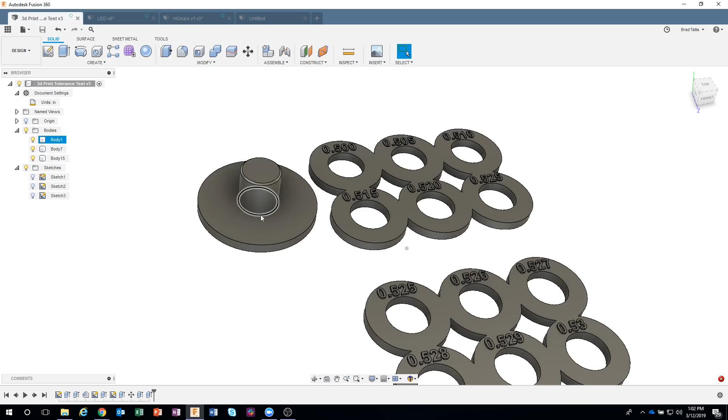And so what I do is I create what I would call almost like gauge blocks for testing out shafts and holes. So you can see here, I just created a really basic part. And if we were to inspect this surface here, we can see that that's a 1/2 inch diameter post. And then I print this and I say, okay, that's supposed to be a 1/2 inch. And let me go ahead and show you here. So here's that part.

I'll take my tool. Let me switch to inches really quick. And I just measure across that, and it's exactly 1/2 inch. So this makes me happy. My printer is pretty darn perfect for printing that post.

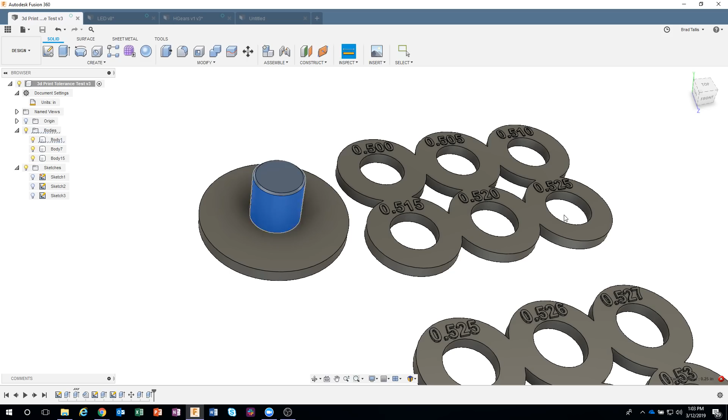Now, you'll notice over here, I have a bunch of rings, basically, and I've thrown some text on there. And what I do is basically create a gauge block of different sizes, okay? And when we print that, it ends up looking something like this. And so what this allows me to do is I can now come in here, and I know the very first one is 1/2 inch, and I can see that that actually does not fit. There's no tolerance there whatsoever.

And hopefully, I don't know how well this is going to share. But then what I can do is I've gone up about 5 thousandths on each of these. So I can see that one still doesn't fit. That one starts to fit, but doesn't go down the post very well, so that's still too tight. And I can just keep working along until, so here, for example, that one slides on fairly easily. And then this one here, again, slides on fairly easily.

So that's the 0.52 and the 0.525. So if we switch back here, it was this one right here, this 0.52 and this 0.525. Okay, so then what I do is I know that that's fairly close. Oops, I meant to drag. So then I created another one where I went up, 0.525, 0.526, 0.527, and printed that out to basically tighten that tolerance even more to figure out what is the best one.

And now I know that if I have a 0.5 inch post, I want to make the hole or whatever that fits over that to be 0.529. Okay, so I'm going to show you how I did this in Fusion. I'm going to show how I created these, and then I'm going to show you how to add this 0.529 to your designs. So a couple little tips and tricks here.

In this case, I'm going to switch into inch, since that's what I've been talking about so far. I'll create a sketch. And actually the very first tip I should show you in regards to 3D printing is right up here. You'll notice that my Z direction is pointing up. Okay? If I go into my preferences, you'll see default modeling orientation. And sometimes it could be Y up or it could be Z up.

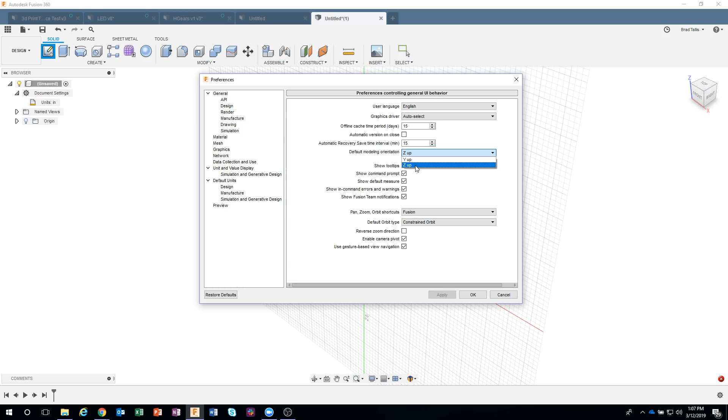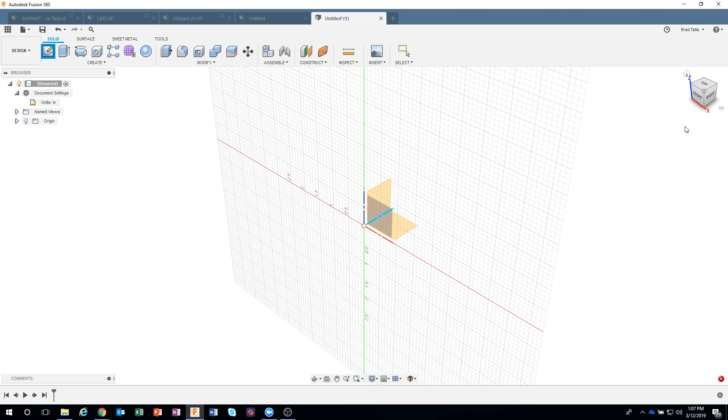And if you're doing a lot of 3D printing or CAM, for example, I would definitely recommend switching that to Z, because a lot of the slicers out there say that Z is in the up and down direction. So we want to kind of match that. If it was Y up, when I go to 3D print, my parts will be 90 degrees from the bed, which isn't a big deal, but it's just one more step that you need to deal with. So the very first thing I want to do is make sure that my Z is up.

Okay. Then I'm going to come in and create a sketch, and let's just draw it on this top plane. And I'm just going to create a circle. And in this case, let's just do 1 inch. Then I'm going to create another circle inside of that. And we know that we want to start at about 0.5, so I'm going to say 0.5. So I just created 2 circles, which basically creates this kind of washer shape.

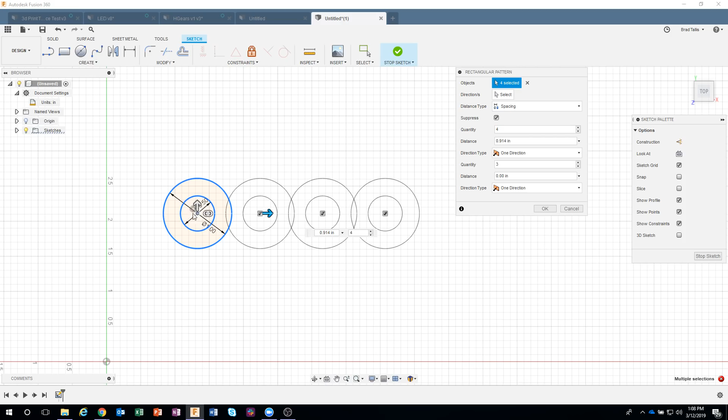Now I'm going to pattern this. I'm going to do a rectangular pattern. Just draw a box around everything and start to drag. Now I could leave the spacing like this, but then it's going to print out a whole bunch of individual blocks, gauge blocks if you want to call them that, which I think is harder to manage and deal with. So I actually overlap them just a little bit, something like this. And let's do maybe 4 in one direction, and I'll come down and do the same thing. I'm going to overlap them a little bit, like so. And let's just do 2 in this direction.

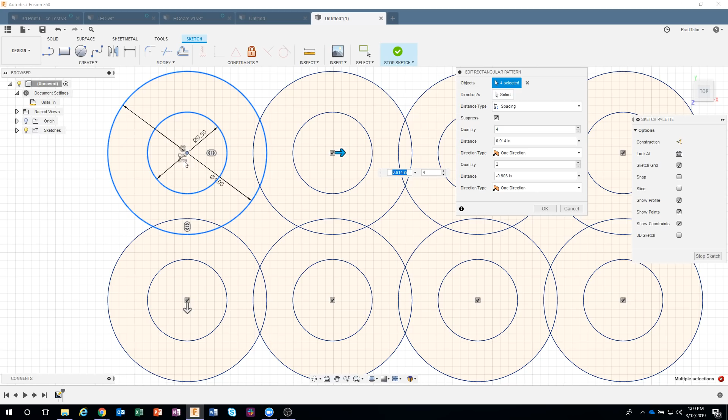Now, because it's a pattern, all of these are the exact same size, so I can't come in and change this. It's basically creating a copy of this original and patterning it. However, if I zoom up, you can see this little square icon I just clicked on right there. That's actually the pattern constraint. And if I double click on it, it allows me to come in and edit my pattern. So if you ever need to come back and change your pattern, you just click on that icon. But what I'm going to do instead, I'm going to select it and then say delete. So we used the pattern to create our shape, but now they're no longer linked.

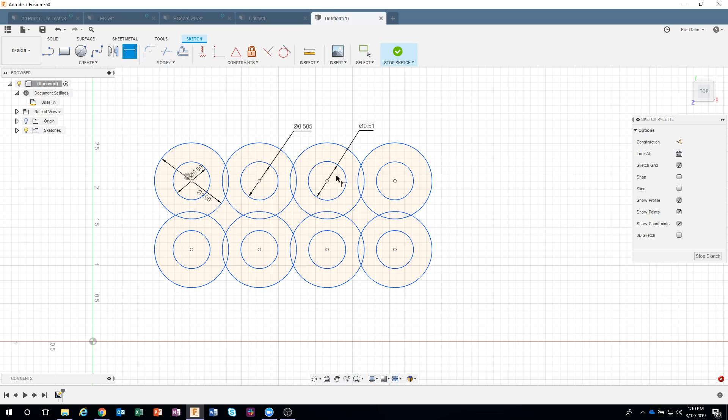So for example, I could come in and throw a dimension on this guy and say 0.505. And it's going to be kind of hard to see, but you'll see that these circles are changing now. So then I could say 0.51, and you see that got a little bit bigger. And so all I have to do is just quickly come in here and say 0.515, and continue going through this.

Okay, so this is how I created my gauge blocks. So the tip here to take away is the fact that you can use the pattern to create your shape and then delete that pattern constraint and then come in and tweak with this. So let's just say 0.53 and then finally 0.535 or something. And again, you can make these dimensions whatever you want.

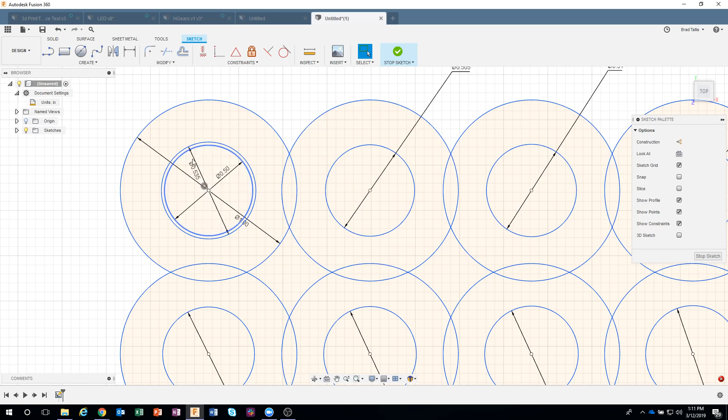So I'm going in a fairly large step first of all. So for example, let's go ahead and create a circle, another circle over here, and let's make that 0.505. So we're actually taking a look at hole diameters between these two lines. So hopefully my printer is good enough to be able to print pretty high quality between these two. And so I'm able to then really kind of narrow down the exact size that I want for clearance.

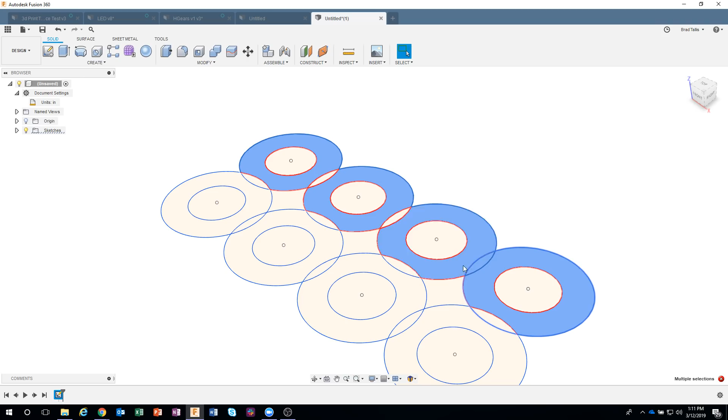So I'll stop my sketch, and then you just basically have to select your profiles. Now you're noticing I'm going to have to come in here and select a whole bunch of these little faces and all that kind of stuff, which would take quite some time. So instead, let's just do a press pull. I'll draw a box around the whole thing, and then I can come in and clear out the big regions, the circles. So I think that's much faster than trying to select all of these little tiny ellipses that you see. So another tip, just kind of simplify your process there.

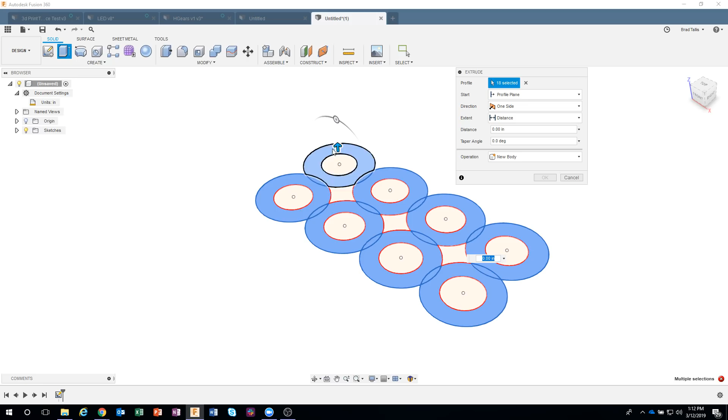Now, if I wanted to, I could take these sections out, which is kind of how I did it in mine. And then I'm going to go a specific distance. Let's go, in this case, 0.125. Now, why would I want to do that? Well, we're using this as a gauge block to see what size circles they are, but I can also use it to check my thicknesses.

So if I say print 0.125, I could then measure that with my micrometer here. I could say, okay, let's measure that distance and see what the distance is. Of course, my micrometer turned off. And in this case, it's 0.1, which is probably what I made it in my original print. Instead of 0.125, I probably just did 0.1. But that way I can verify, sorry about the reflection, what thickness this is. Okay, so another way to help use this one tool in multiple different ways.

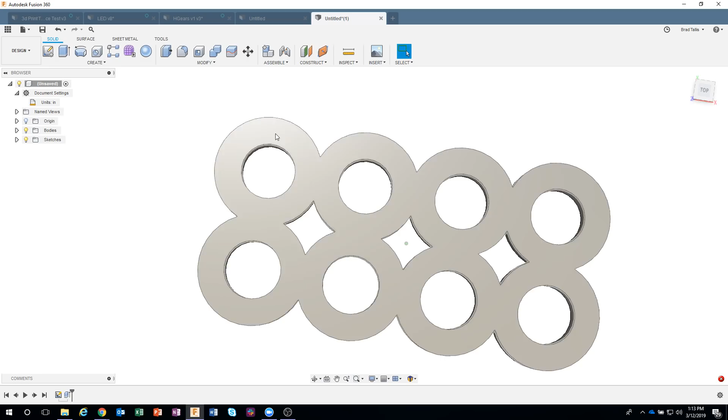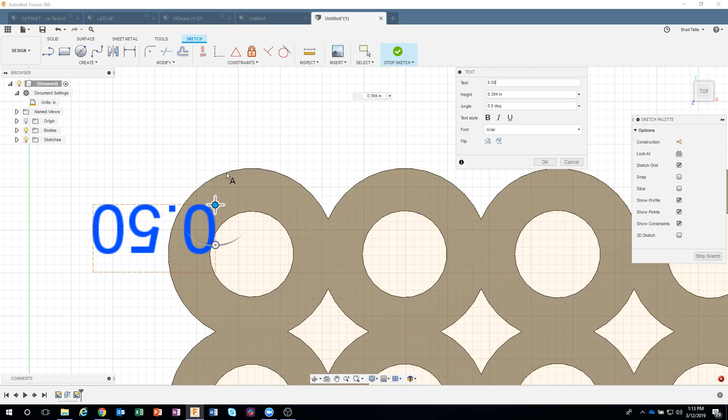Now, what I did was I actually created some text, and I'm going to do one of those. I'm going to click on this face, right mouse click, and create a sketch. Then I'll go into my text command, put the text where I want it to be, and let's just say 0.50. Now, you'll notice I can do a vertical flip, a horizontal flip. I can change the size. Let's just make that 0.125. That's a little small, so let's try 0.2. That looks a little bit better.

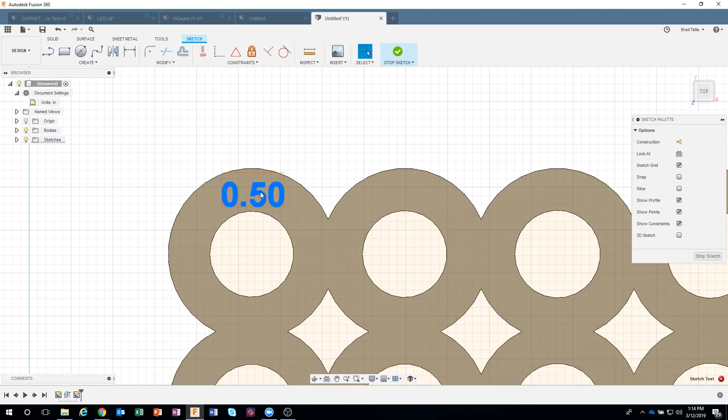And maybe I'll make it bold. Okay, and then I'll position that where I want. I just grab that little round ball with the crosshairs, and I can move that where I want that text to be. I could come in and change the font if I want to. I'm just going to go ahead and say OK. Now this is still text. Now I could copy this, so I'm going to Control-C, Control-V. So just like you would copy text or a photograph, I did a Control-C, and then a Control-V for paste, and I'm able to drag that across. Okay.

So now let's pretend I did all of my text. What I need to do is to select it, right mouse click, and say Explode Text. I get this question quite often. It's like, okay, I can create the text, but I can't do anything with it. As soon as I say Explode Text, you'll notice that it turns it into a profile. Okay, so I'll do the same thing over here.

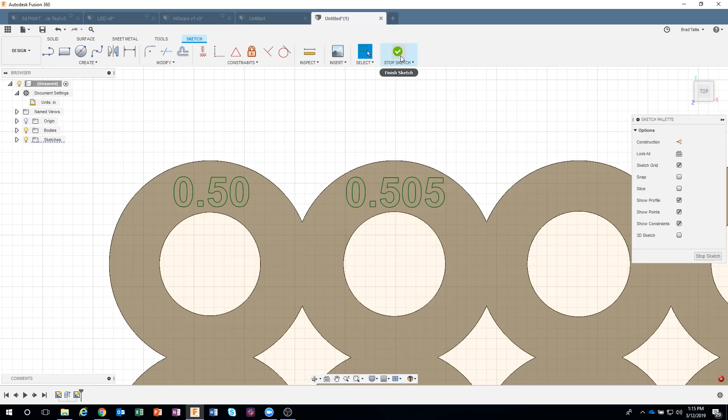I'm going to edit this text first of all. Let's say 505. Maybe drag that a little bit to the left. Maybe look at it from the top again. Can I move that in place where I want it? And then I could come in here and say Explode Text. And now that's its own little profile. Then I could come in and extrude this. So I'll go ahead and select my profiles.

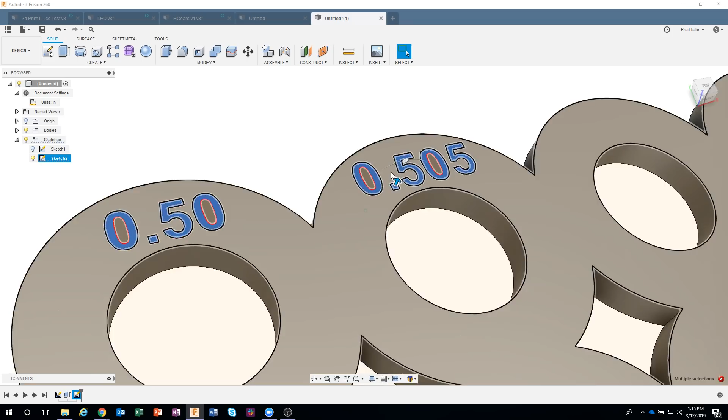Now you'll notice that this is taking some time, and think about how many circles I have, and if I'm doing 2 or 3 of these gauge blocks, this could take some time to do. So now I'm going to extrude this up, and let's just say 0.05 or something like that. I'll say OK, and you can see that it actually extruded that text as part of our gauge block.

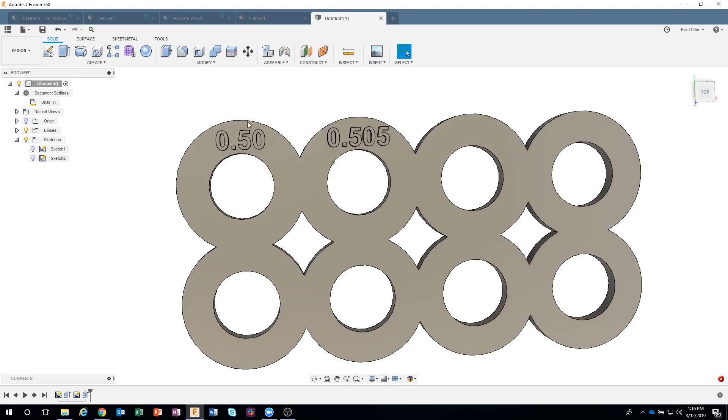Now, like I mentioned, that could take some time. So another trick that I do, so I'm going to undo back. Another trick that I do is I create a reference. So instead of using text, I might come in here and just put a notch. I'll just do something like on this guy here. And I'll extrude that through the part. So I'm just going to click on that face there, and I just create a notch like this.

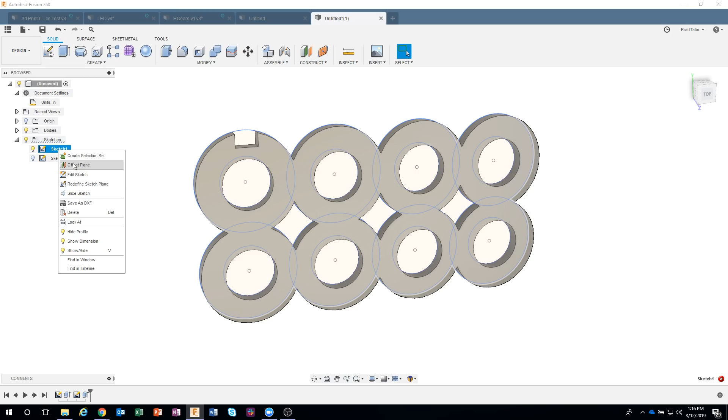Now I'm not having to do any text, but I can go ahead and turn on my sketch. And here's another tip for you. If you right mouse click on your sketch and say show dimension, I'm going to go ahead and click on show dimension. And I'm still in 3D. I'm not in my sketch environment or anything like that. I'm actually able to see my dimensions in 3D. So now you can kind of see what that looks like.

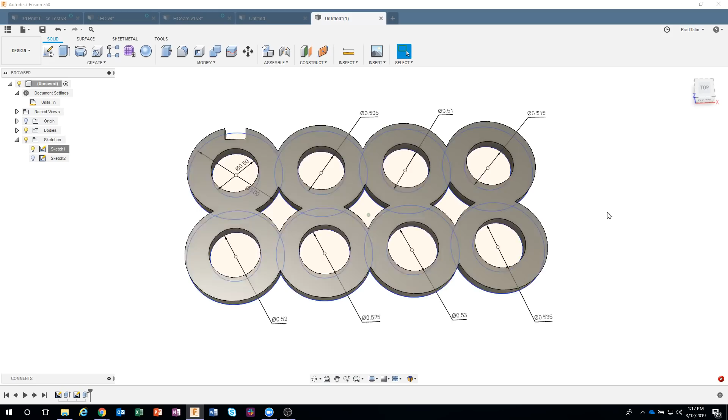And when I print this, I could just come back and look at my screen and say, okay, I know that this is the 0.5 one, and this is the one that I liked. Okay, that's 0.53. So instead of taking all that time to create the text and extrude it and type it in, etc., I'm just going to use this kind of as a reference.

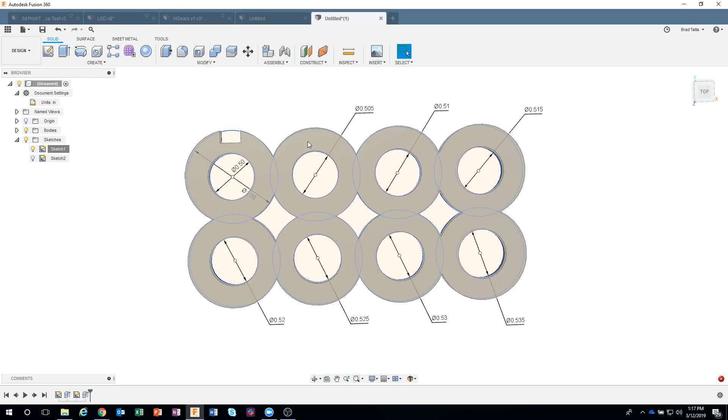So another time saver. I looked over at the chat window really quick, and I saw somebody asked, why do you have to explode the text? And that's a really good question. Basically, you want to turn it into a profile. So let me show you again. I'm going to click on this guy. We'll just say create a sketch, and I'll do my text.

So I really appreciate these questions. I know Aaron's helping me out here answering some of these questions for me.

So I'm going to rotate that around, make it bold, change the size. I think we said 0.2 was good. Okay, right now it's just regular text. If I say OK, I can edit this text. So you'll notice I can say edit. I can add stuff to it. So text 2, for example. I could change the size, the angle, etc.

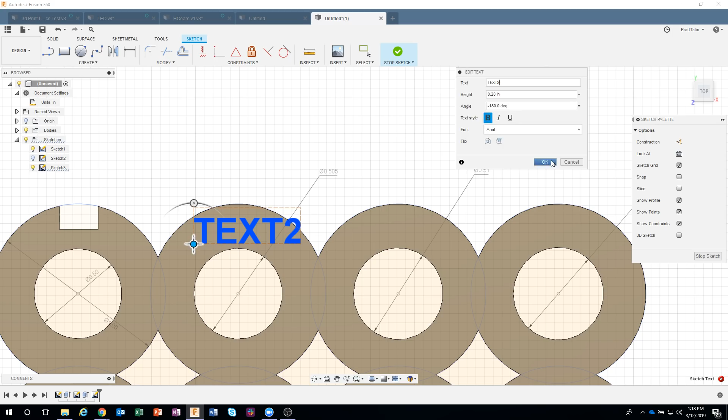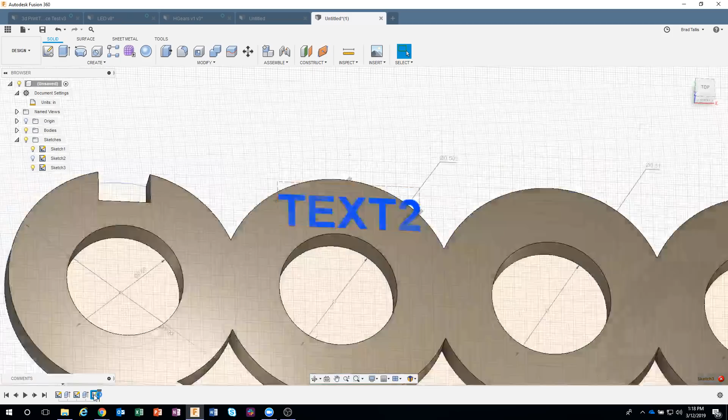But if I say stop sketch, you'll notice I can't really do anything with it. I can edit it, but I can't extrude or anything. So if I try clicking on this, you'll notice I don't get the option, for example, to extrude. Okay. However, if I click on it and say explode text, you'll notice it looks like a profile. It's no longer blue on the inside, and there's actual profiles here.

The drawback with this is, if I right mouse click, there's no edit text, right? We've basically said take that text and turn it into a profile. So you want to make sure that you've got your text the way you want it to look before you explode it. Okay, so great question there. Okay. Let me undo back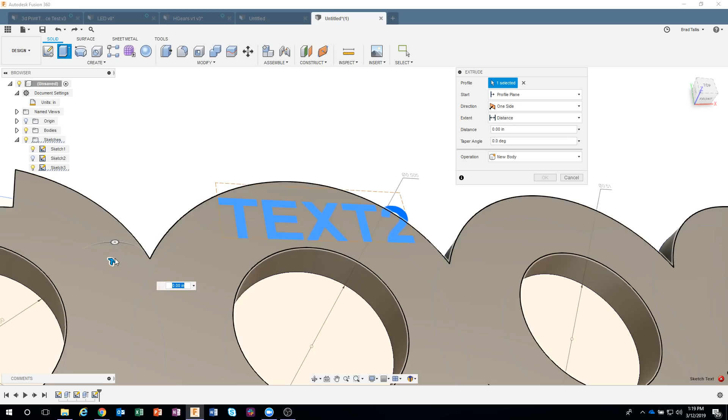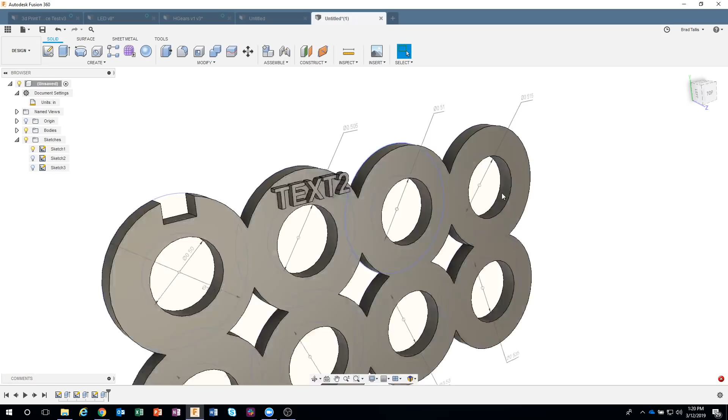to here. So I saw somebody said you can click on the text and say press pull, and you'll notice that does work. Okay, so I think it was Chris that said that. So yes, very good point. You can use the press pull command, which is basically offsetting faces or extruding faces or doing a fillet depending on what you've selected. So yes, you can do the press pull. Great job. Good observation there. Okay, so again, it depends on what you want to do. You can do a reference like so, or you could add the text if you want to.

So, okay. Yeah, thanks for pointing that out, Chris.

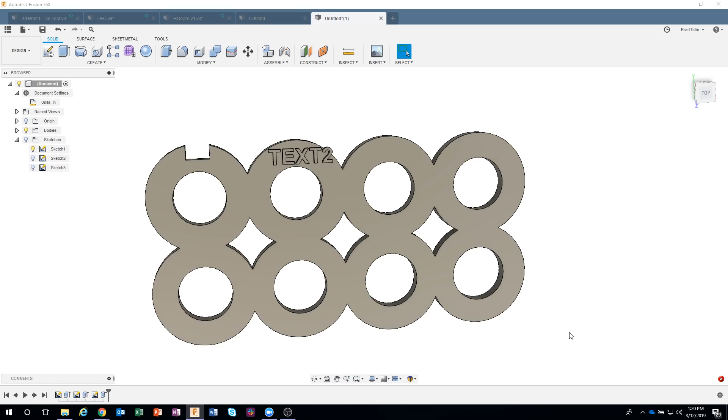I appreciate that. Okay, so what I did here is I've created my gauge blocks basically, and I'm ready to print. I want to test print this. Actually, the other thing I should probably do is create my piece that this is going to fit on top of. So let's just do the exact same thing. I'll start with a circle. Let's make this 1.5 inches in diameter, just for fun.

And then I'll do 0.5. So let's just say 0.5. I'll stop my sketch. I have my sketches turned off, so I'll turn those back on. I'll say extrude. And again, I might go a very specific distance. Let's say 0.125 in this case. Okay. Then I'm going to turn that sketch back on, and I want to select this other profile.

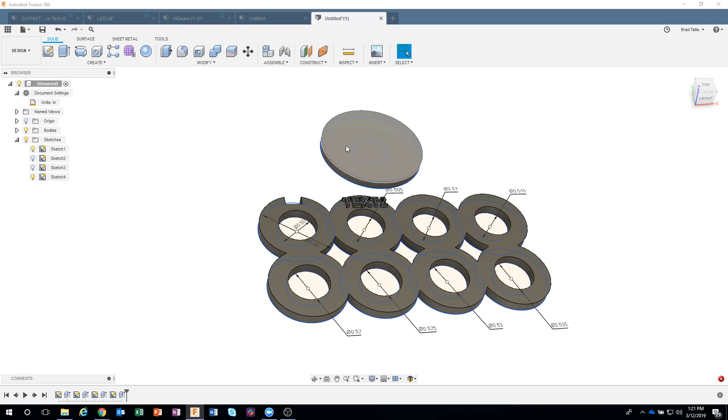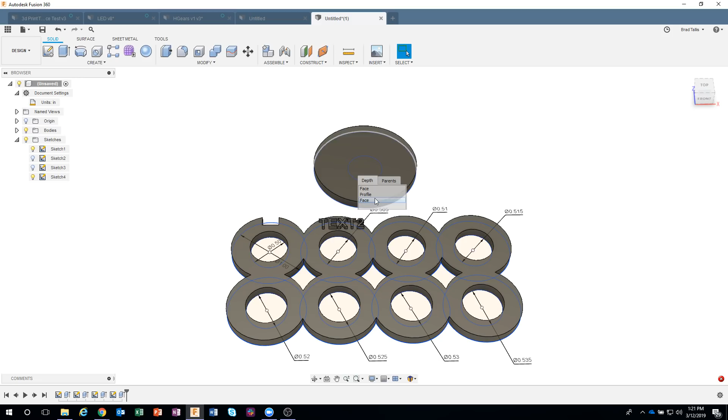And I've shown this tip before, but it's kind of buried. It's actually underneath. It's right here. But instead of having to rotate, I can actually just click and hold. And it allows it to kind of probe through the part. And you can see it's going to first find the face, then the profile, and then the bottom face. So I can go ahead and select the profile and extrude this up.

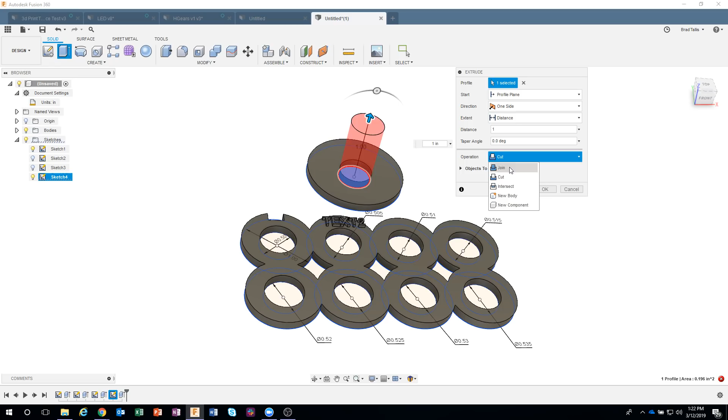Now, again, I could be very specific. This is coming from the bottom, so maybe I want to see how accurate my printer is. So I might say I want my post to be 1 inch tall. But because it's going through my part, it wants to cut. So we're going to change that from cut to join, and it's actually going to join those parts together.

And then finally, I'll come in here, and I typically put a small chamfer on the edge. So let's just say like 0.02 or something like that. Maybe even a little bit larger, 0.04. Let's do that and say okay. That way it kind of helps guide the gauge blocks onto the post. So, okay. So now I'm ready to print.

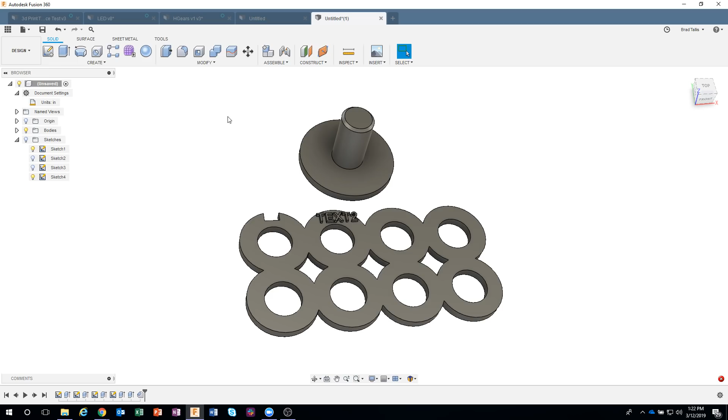So there's a couple options here. Again, I'm using the new user interface, and I don't know if you saw the video that was just released about the update. There's a lot of really cool enhancements, and one of them is the new user interface. So I'm going to come over here into Tools, and here is my 3D Print Make icon. So under the Make pull down, we can do 3D Print. You can get a quote from Proto Labs. You can do 100K Garages, etc. But we're going to say 3D print.

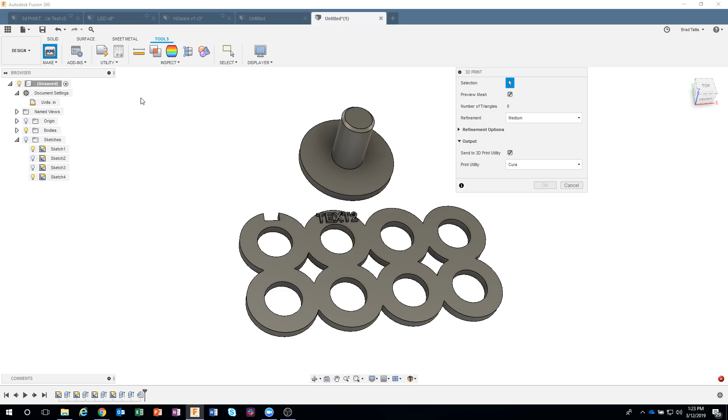Now you'll notice it says selection. And so if I pick on this guy, it's only going to select this particular part. If I try and add in this one over here, you'll notice it unselects that, and it's only going to print this particular part. Okay? So by saying 3D print, it pretty much limits you to one body. Now I'm going to show you a really cool workaround to get past that.

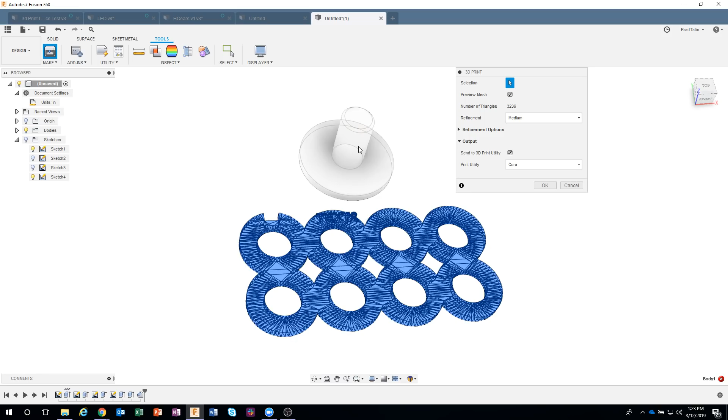Okay. So let's go ahead and pick on this one here first, and I'm going to talk about this 3D print menu. So I'm going to zoom up a little bit here. So the first thing, it says preview mesh. If I don't have that turned on, you don't really see anything, but I like to have that turned on, and I can kind of see the accuracy, if you want to call it that, of this 3D print. It's basically the refinement. So you'll notice here it says there's going to be about 850 triangles to make up this curved body. Right now it's set to medium.

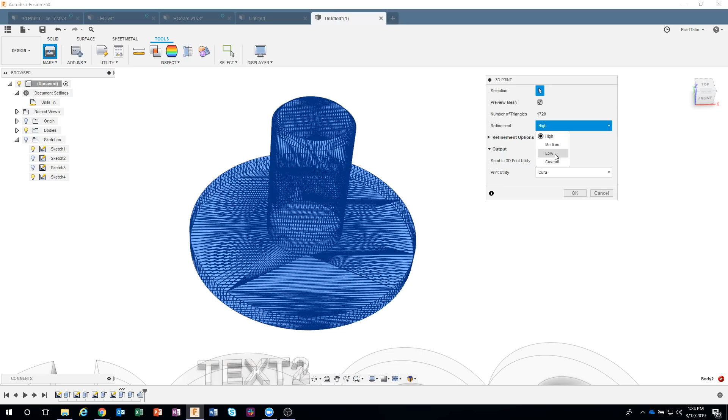If we change it to high, you can see it went from 850 to 1720, a lot more triangles. Okay? So again, depending on what you're trying to print and how accurate you want that to be, you might want to increase your refinement. Okay. I can say low, and you'll notice 400, or you can say custom. And what that allows you to do is to actually come in and tweak your surface deviation, your normal deviation, and this maximum edge length I use quite often. And you'll notice it's set fairly high.

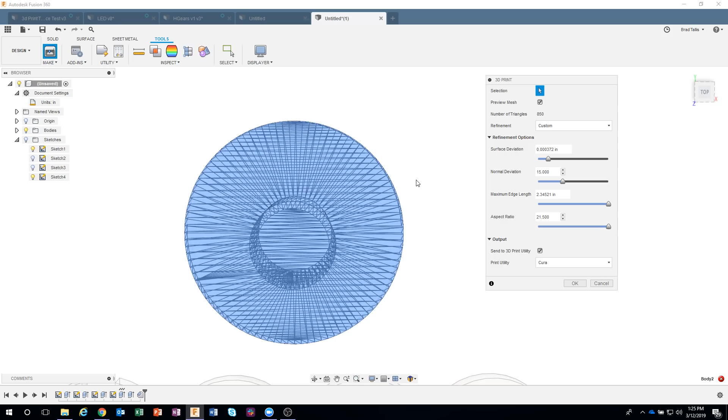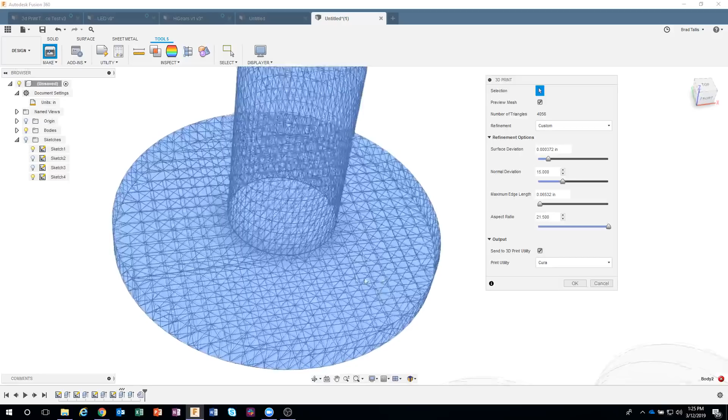And if I look at it from the top, it's kind of hard to see because of all the triangles, but basically there's really large triangles going back and forth to create these curved surfaces. But if I bring this edge distance down, you're going to notice the part's going to start to change what it looks like. So I'm going to keep cranking this down a little bit. So instead of big long triangles, it's now broken down almost into quads, like these little squares of triangles. And you can get nicer looking results, again, depending on what you're trying to print, by changing some of this deviation.

Now, 99% of the time, I just use these. But if I was doing something with really complex surfaces, I might want to come in and specify my surface deviations and my maximum edge lengths, and you can even change your aspect ratio. So you can see how more edges are being created for this vertical post here. So that is your refinement options.

Okay. And then we have this output. And you have the option to send it to a 3D print utility. Now you'll notice mine says Cura, and that's because I actually have Cura installed on my machine. By default, you'll probably see Meshmixer, Print Studio, PreForm, and Custom.

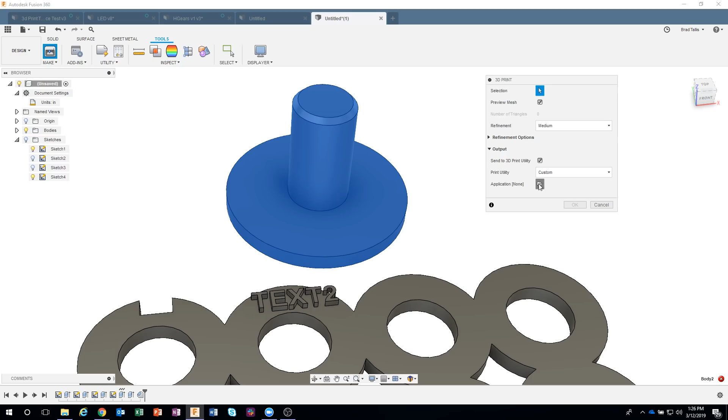But let's say you're using Simplify3D or Cura or Slicer or whatever some of the other ones are out there. If you don't see that in here, all you have to do is click on Custom, and then you'll notice this little folder icon, and that's going to allow you to go out and point to where your slicer is at. So for example, mine is in Program Files under Ultimaker Cura. And all I have to do is point to the Cura application, and then that will show up in my pull-down list. So that's how you add in your own slicer into this list.

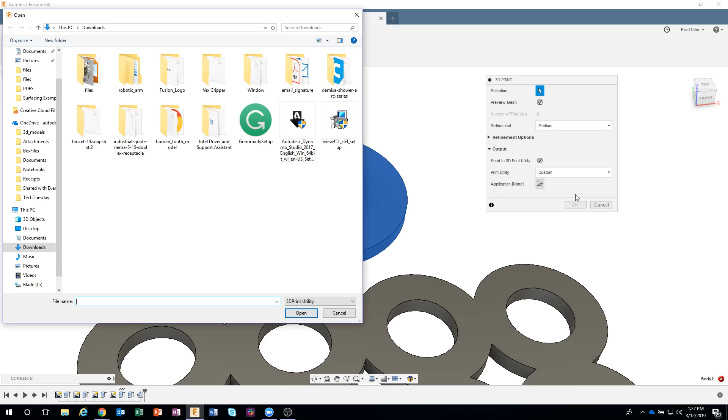So I'm going to say Cura, and I'm going to say OK. Now what this is going to do is it's going to start up Cura on my machine. Unfortunately, it takes a little while to load up Cura. But it's going to only bring in this particular part. But we'll notice a couple key things here. It shows me what that's going to look like. I have all my settings. It has my printer in here, etc.

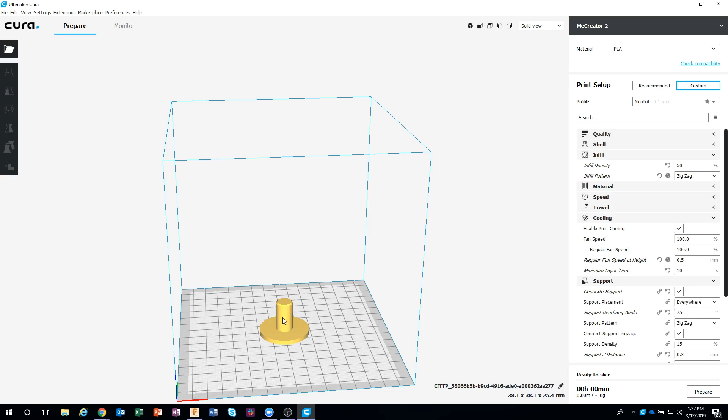But the important thing is notice the orientation of it. And again, this is because we did the Z direction pointing up. Okay? If I didn't have that pointing up, it would be rotated. And what I mean by that is it would come in, let me bring it back, Cura, hopefully. Oops. Let me move this over so you can kind of see it. My part might come in looking something like, in fact, I've seen it before, where it's basically at 90 degrees to the table. So it would come in looking something like this, if I didn't have that Z direction up.

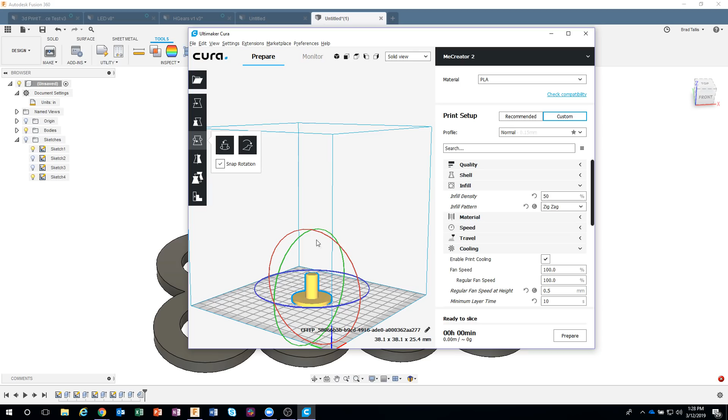Now, that's okay. All I have to do is come in and say, rotate, and rotate that 90 degrees. But I don't want to have to do that every single time. So again, make sure you say Z up.

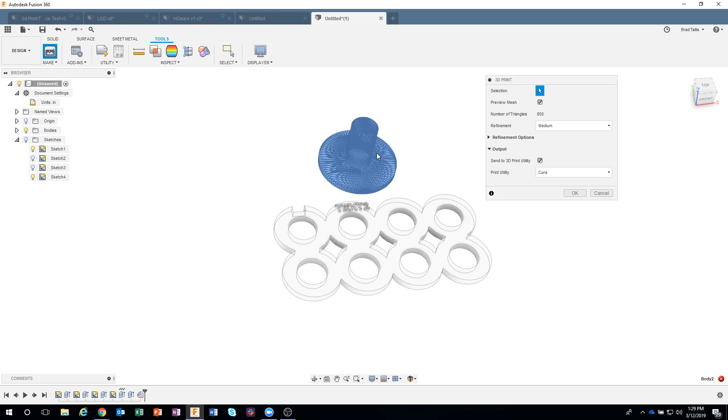Okay. My next tip here is, what if I wanted to print all of this at the same time? And when I clicked on this make, it only let me pick on one of these at a time, even though I'm holding down Control or Shift, doesn't matter. It's not letting me print both. So to get around that, all you have to do is a right mouse click at your top level in your browser and say Save as STL.

So I'm going to go ahead and click on this, and notice this time it's giving me my preview for all of the parts. And this looks pretty similar. There's some slight changes. But the key thing is, notice it still is going to allow me to send to my 3D print utility, Cura. So I find myself actually saving as STL more often than clicking on the 3D print icon, because I typically position the parts the way I want in Fusion, and then I'll say print.

Okay, the only difference you'll notice now is you'll see this format, binary or ASCII, and then you'll see this structure, one file or one file per body. So if I were to say one file per body, it's basically going to output 2 files here. Okay, I'm going to leave it 1 file. I'll leave my refinement medium in this case.

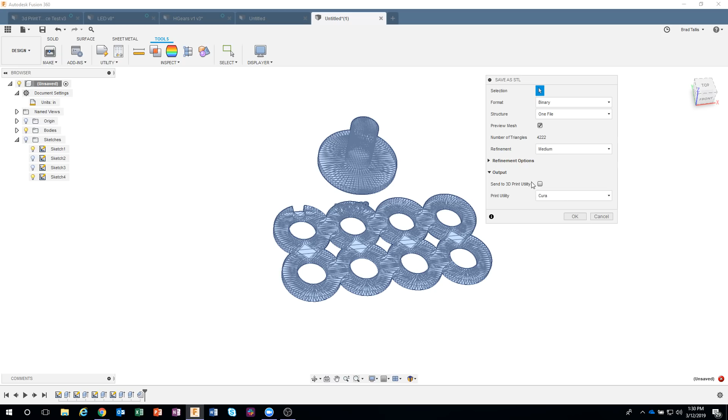And if I do not have this turned on and I say OK, it's going to allow me to save this locally onto my machine as an STL file. I could email this to somebody, I could put it on a flash drive, whatever, take it out to my machine, okay? Or I'll do that again, save as STL. This time I want to send it to a 3D print utility, Cura. I'll say OK. It's going to bring up my slicer, whichever one that you have selected.

I'm looking at some of the chat window. I can see people are saying, oh, that's great about the Z up, and I hated it when my prints were rotated 90 degrees. So hopefully you're learning how to resolve those.

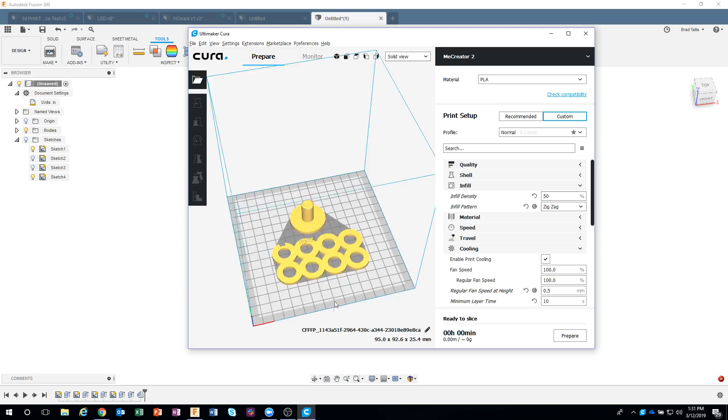But notice what happened this time in Cura. You'll see it actually brought in all of my parts, and I'm ready to slice. Okay, so I'll go ahead and slice this really quick. I clicked it twice, so it says unable, but now it goes. There it goes.

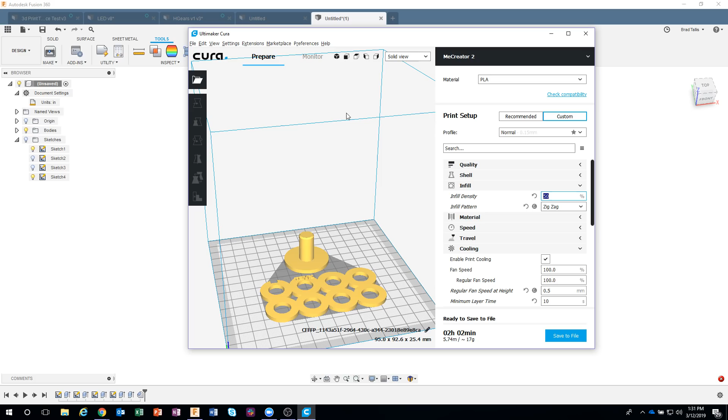So it's going to take 2 hours with the settings that I have. I'm actually printing something else right now with really high infill, so that's why it would take so long. I obviously wouldn't have that much infill. Layer view, we can kind of slice through. And the thing I love about designing parts in Fusion is they are always watertight. Unless I do something majorly wrong, I design something in Fusion, I send it to my printer, boom, it's done. It's that easy.

So with that, hopefully the main tip there was to create some gauge blocks to try out the tolerances on your machine, okay? So we determined basically 0.029 is the difference between this shaft and that hole. So how would I do that in my designs?

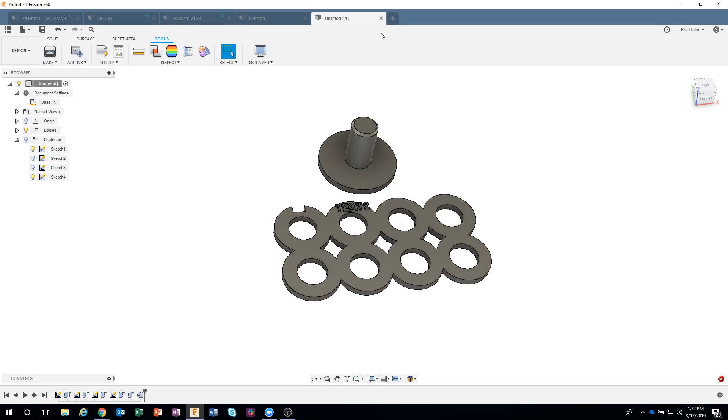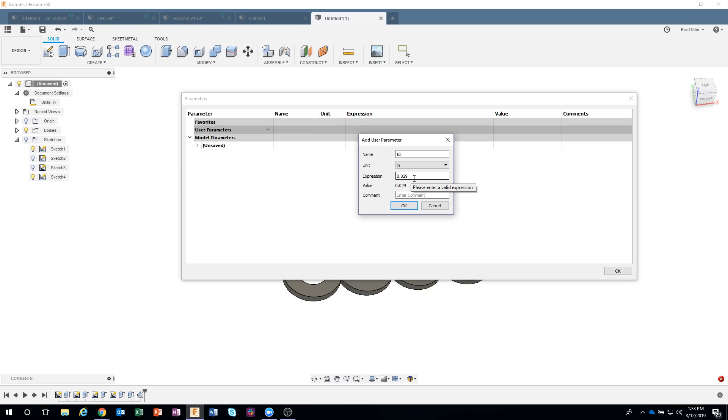So what I would recommend doing, let me switch back to solid here, is I would create a parameter, okay? So I'm going to say change parameters, and we're going to create a user parameter. And I could call it whatever I want, but let's just call it tol for tolerance or something like that. And what's the expression? I'm going to say 0.029. I'll say OK. And I now have a user parameter called tol.

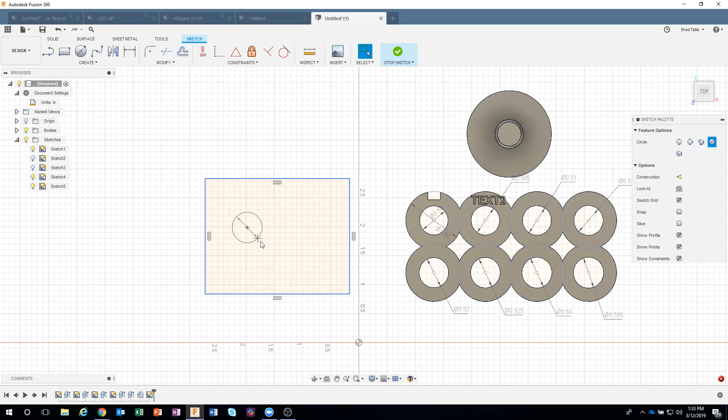So as I'm creating my new part here, let's just go ahead and design a block or something like that. And I've put a hole in here that I want to have. I'm going to say that's 0.5 plus whatever my tolerance is. So I just start typing in like TOL, and it's going to become 0.529. Okay, let me edit that again. What did it do? I wanted the hole to be 0.5.

So I don't have to remember, okay, everything that's 0.5 now needs to be 0.529, blah, blah, blah. All I have to remember is I want that to be a 1/2 inch hole. Then I'm just adding in that tolerance. And the reason I like doing this is because maybe I do a test print and it's not quite enough. Well, I could come in here and say, for example, let's go into my parameters.

So I did the S key. Hopefully you guys know this shortcut. S brings up your shortcuts and you can search. So I'm just going to search for parameters. And I'm actually showing this because of a live stream earlier on when I was talking about parameters. Somebody said, oh, you can't edit your parameters when you're in the sketch mode. And that's sort of correct. There's no menu that says change parameters, but I'm able to find it through my sketch search.

And I can come in here and say, okay, my parameter, let me move my screen so you can see this. So let's say instead of 0.029, it's now 0.05. Watch what happens to my circle. You saw how that got larger. Okay, so I can come in here and change this all day long, and it's going to update all of my holes. Okay. So that's how I go about doing this.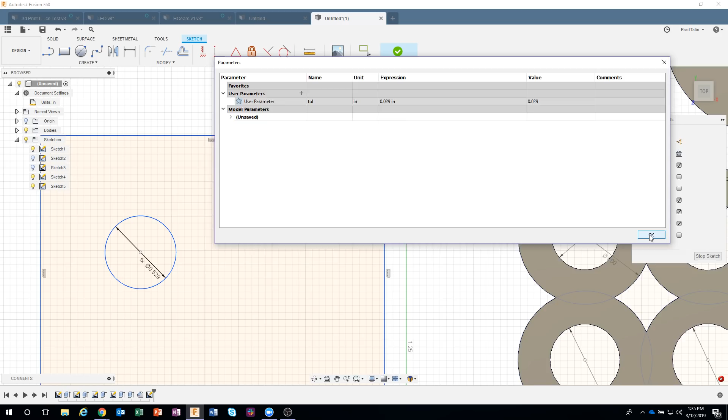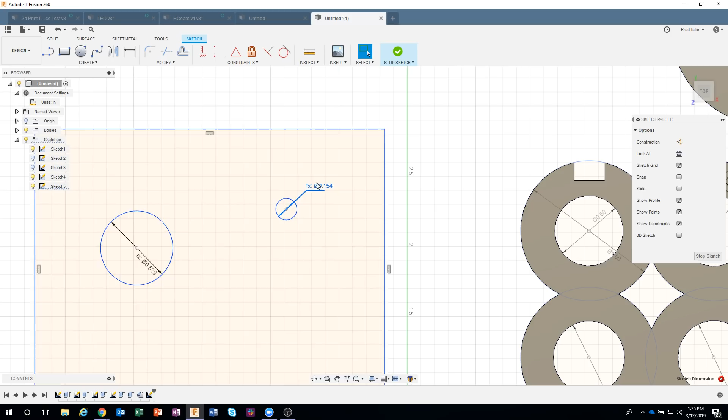So let's do something else. Let's say 0.125 plus tol. Okay. So now that's going to be 0.154. Let me move this out so you can kind of see that better. So again, all I care about is that's a 0.125 hole, but then it's going to figure out what it needs to do to make the tolerance correct. So, okay, hopefully that makes sense. And if I were to print that, the post would fit down inside of that part.

Okay, I'm glancing over at the chat window, making sure everybody is hearing me okay. It sounds like people are learning lots. I love the S key. That's really cool.

The next tip I'm going to show you is a little bit different. And this has to do with... Oh, actually, before I do that, let me back up a little bit. I started out by showing these gears, right, that didn't quite fit. So all we did is we loaded up my son's 3D model. He spent a lot of time designing this gear here and stuff like that. You can kind of see what it looks like.

And we just went in and edited the sketch for the hole and added that 0.029. And now we can actually put these together. Let me try and assemble this all at the same time. Live on camera, right? It's a pretty tight fit. Let me do the small one first.

But it actually does mesh together, and we can see how smooth, and there's no slop or whatever in here. It's a really nice fit. In fact, if anything, there's a little bit of grinding going on. But now we're able to show how these gears interact with each other. So we solved the problem using that little bit of tolerance.

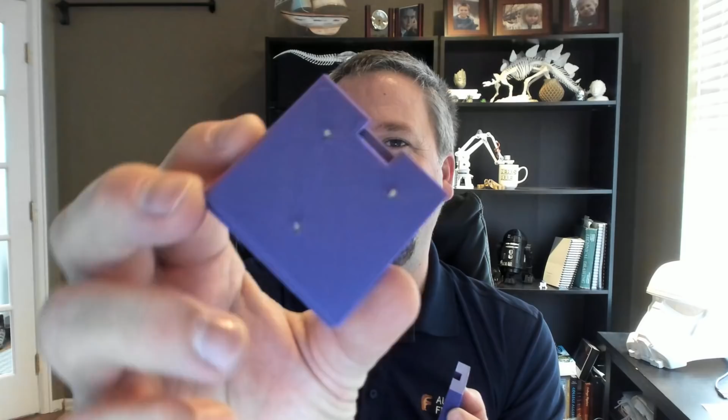So for example, I've got these two blocks, and I want to glue them together or line them up. I don't know if you can see here, I've got these little pieces of filament sticking out of the block here. And on this side, there's little tiny holes. All I have to do is line those up and snap it together, and you'll see how that's perfectly lined up. I could glue this together and even help strengthen the thing.

So I'll show you how I went about creating these little pins like this. All that is extra filament. All I do is stick a little piece of filament in there and trim it off to leave a little bit of a post like so. You can see right there. Everybody has filament laying around.

So what I did was create basically a block of filament. I'm going to expand this open, go in here, and load this guy up. You'll see I just called it filament. And this is the exact diameter I need for my filament to fit in a hole. Let me go ahead and tell you what I mean by that.

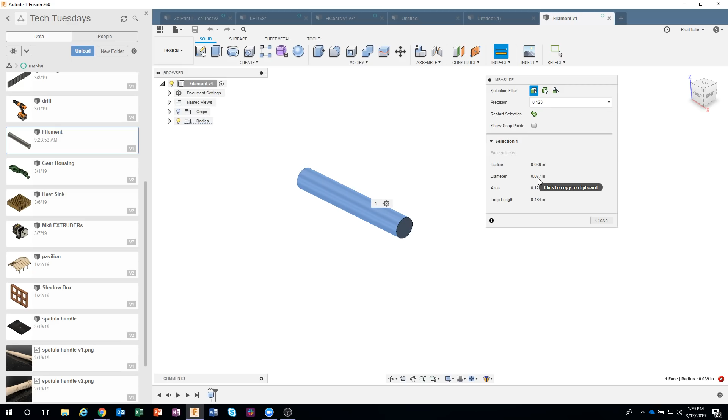I'm going to measure this guy, and we can see that the diameter is 0.077. But if I were to actually measure my filament, let me turn this guy on real quick, it's 0.069 when I measure it. So I've figured out what size hole I need to create in my parts for the filament to fit in nice and easily, without having to force it in there. So then I'm going to use this little piece of filament.

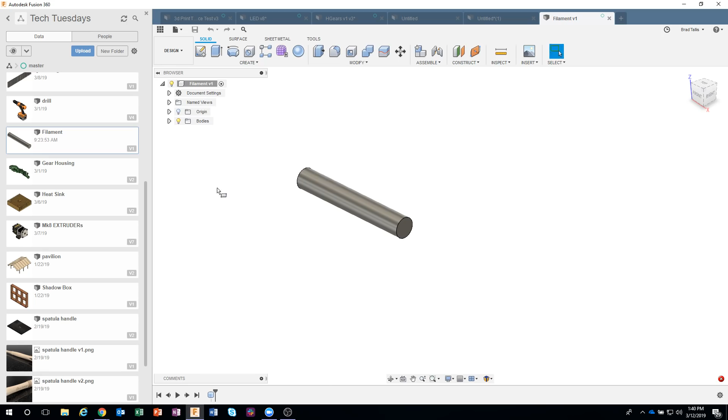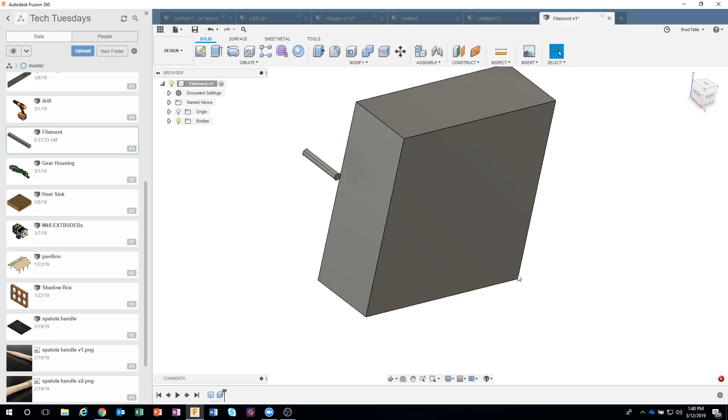For example, I'll keep it simple here. Let's just do a box. I'm going to make this 2 inches by 2 inches by, I don't know, 0.75. Let's just do something like that. What this is going to allow me to do is come in and use this body. So let's go ahead and move it into place here. I'm just going to get it where I want.

And I want to make sure it sticks out. This is 1/2 of an inch in length. So I'm going to come in here and move this guy. I'm going to start to drag, and this is kind of a cool trick here. You'll notice that it's referencing right there. I can click this little down arrow and say re-anchor. You'll notice it's saying that it's moved from this back face 1.308 inches. So it's measuring from that back face.

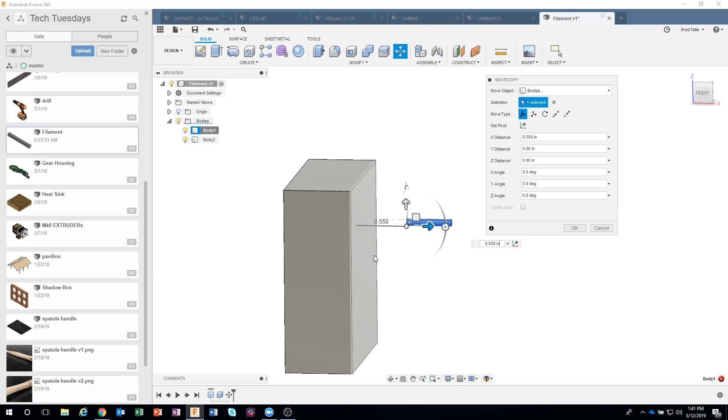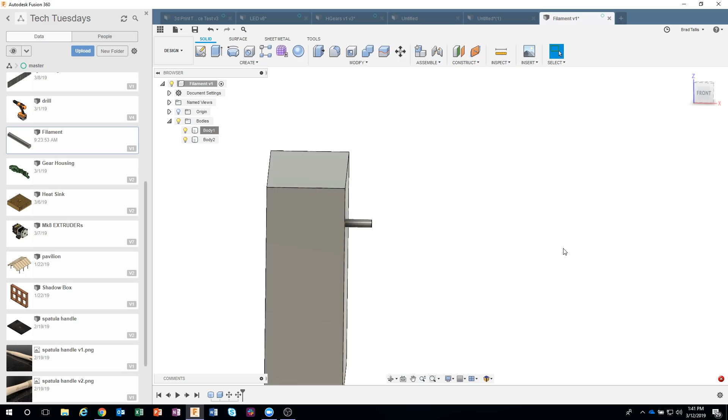But let's say I want to measure from this front face. So I'm going to say re-anchor and click on that front face. And now you can see it's saying it's about 0.5 inches from that face. So if I start to drag backwards, I can go minus 0.25. And we can see, sure enough, it's basically halfway buried into the part. So that re-anchor command is really, really cool.

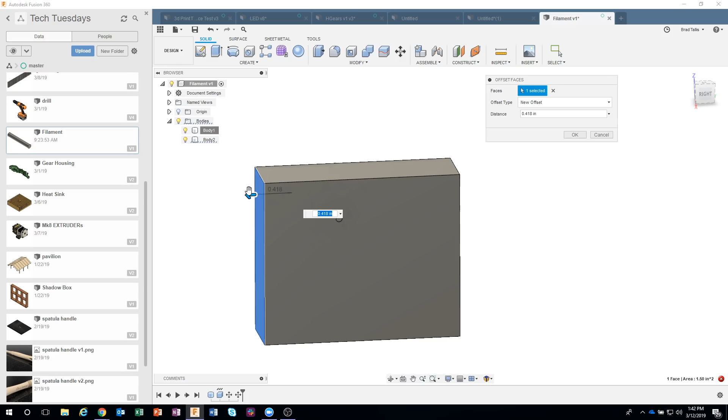Let me show you another example. I'm going to come in here and say press pull. As I start to drag, it's saying I've pulled it about 0.418 inches from where it was. Well, maybe I want to specify the total length, not the little distance here. So I'm going to say re-anchor, grab that back face, and now it's telling me the whole length.

And I want the whole length to be 2.12345 or something like that. And that's what it's going to do from this back face. So I use that re-anchor command a lot. Pretty cool command. Okay, so now I'm going to basically copy this guy and paste it, and drag that over a little bit.

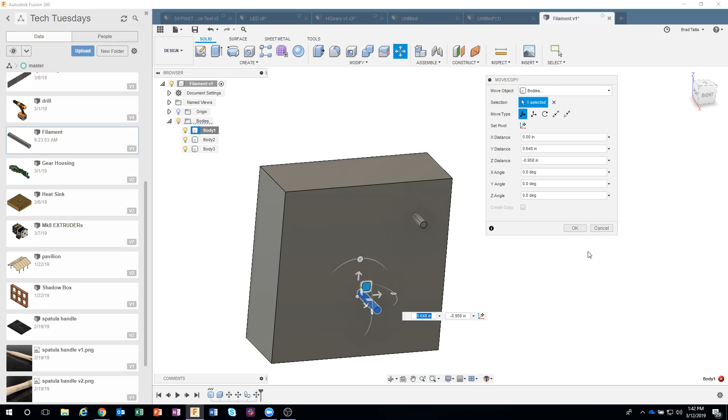And honestly, I could be very specific with the dimensions if I want to, but in this case, it really doesn't matter. Oops, I forgot to say create a copy. So let me do that. I'm going to say move, say create copy, and then I'm going to start to drag, and it'll allow me to do that. And I typically do 3 posts to register from. You could get away with 2 if you wanted to.

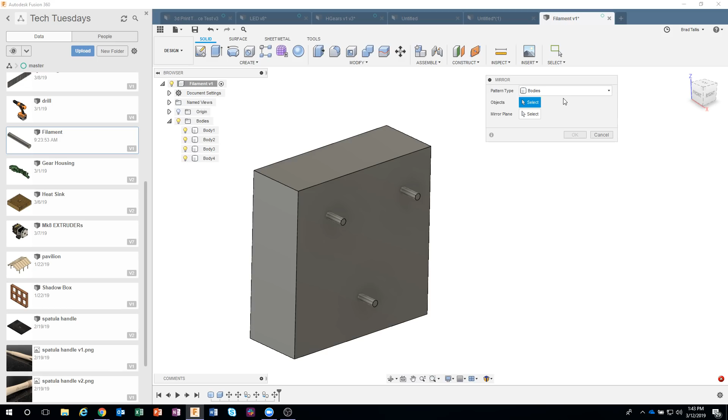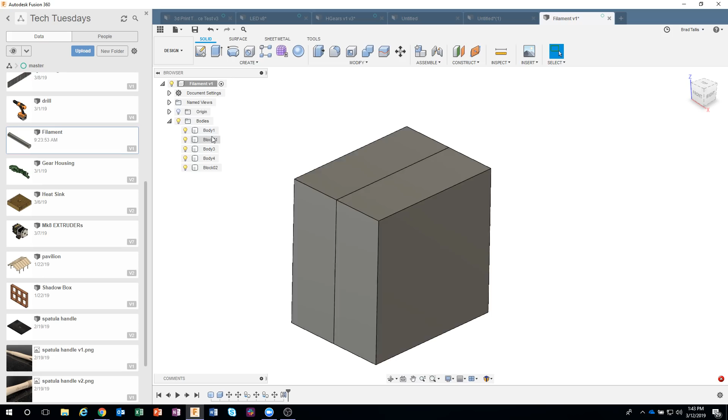Then we'll come in and let me just go ahead and mirror this block. So I'm going to say mirror this body here on that mirror plane. I'll say OK. So let's just call this block 1 and call this guy block 2. That way I kind of know which is which, right? So I'll turn that guy off so we can see what's going on.

But then I just come in here and combine. So the target is going to be that guy, and the tool is going to be these 3 pins, basically. Now I'm going to keep the tool because I want to use it again on the other side. So I'm going to say keep tools. I'll say OK. But if I turn these off, you can see that it subtracted those out there. These holes are exactly 1/4 inch deep.

And then when I go to print this, it prints the little holes in there for me. Hopefully you can see that. And I just stick the filament in. I don't measure to make sure they're exactly 1/2 inch or whatever. I lost my large piece of filament, so I can't show that anymore. But I stick it in there and I just trim it off with a pair of snips. And then that allows me to line these up.

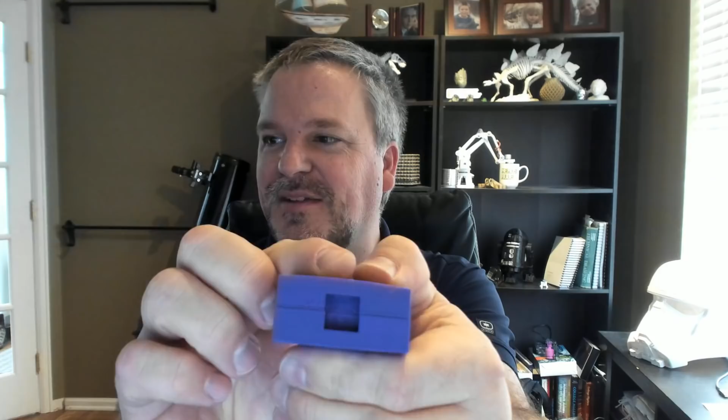Okay. So let me pull that guy off. So we get something that looks like this. I usually put them all on the same side. And then we can line them up and print. And what I really like about this is I created this rectangle in the top to make sure those really do line up. And it helps with strength. So that's another tip that I use for creating some of the larger prints.

So hopefully you learned some tips and tricks on creating prints with Fusion 360, with creating those gauge blocks. I showed the post. I use this all the time, even when I switch filaments. Now I use Hatchbox. I really like it a lot. I'm not affiliated with them in any way, but if I were to switch to like Amazon Basics, I would probably do this again just to make sure that they print pretty similar before I start wasting a lot of material and going to assemble them together and realizing that they don't work.

So with that, I hope that you learned a lot. We just released a new version. Please make sure you check out what's new. I'm going to be showing some of what's new in upcoming live streams. The fact that we can now bend sheet metal parts along a sketch line, I am absolutely ecstatic about. And we did a lot more enhancements besides that, but you can tell I've been waiting for that one for a while. I'll be showing that.

I'm also going to be doing another cutting board. I did one a while back on basically creating some blocks and copying and pasting. And somebody put in the comments how you can use the pattern command, where I was like, oh, you can't pattern because then you can't slice through the part. I learned something, and I can't wait to share that with all of you. It saves a huge amount of time. So I'm going to be showing how to fix that cutting board, and then how to create another really cool cutting board in an upcoming live stream.